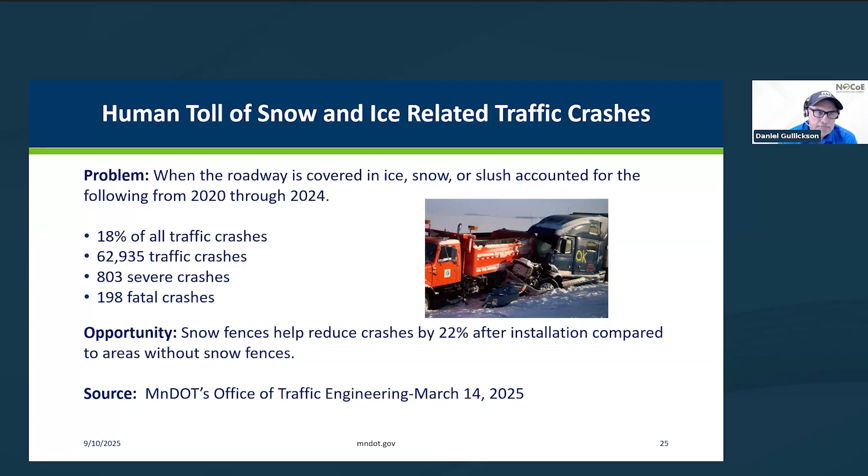You know, one of the keys to a maturing snow fence program is knowing when and where to deploy snow fencing. And in MnDOT, we actually have a team of designers whose job is to design blowing snow control treatments. And we look at existing blowing snow problems. We look at, you know, has the land use changed in these areas? Maybe there's going to be a new roundabout project that's going to create a future snow problem.

You know, we get involved with our program delivery folks to look at upcoming projects and look at how we can prevent blowing snow problems after they're built. And then also, you know, finding available funding to help solve these problems. Next slide.

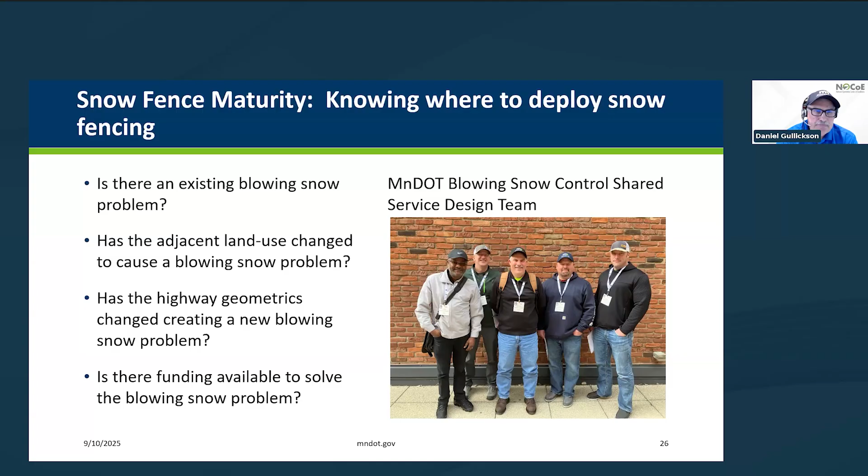So in Minnesota, along our MnDOT maintained roadways, we have about 737 living snow fences. Many of them were planted in the 1970s, maybe some even earlier, and they're still providing function for us. We have 223 structural snow fences, and our structural snow fencing is the flexible composite rail type system. Permarail is one of the manufacturers, and we also have another manufacturer named Magnum Ventures that make the structural snow fence for us. They come in 4, 6, 8, and 10-foot tall heights.

We also still put up the seasonal snow fencing that's 4 foot tall, put it up in the fall, take it down in the spring, and then work with landowners and farmers to do standing corn rows. Standing corn rows is our gateway to work with a farmer landowner to see the benefits of controlling the blowing snow, and to introduce them to maybe a future living snow fence or structural snow fence that ends up being a longer term commitment. Next slide.

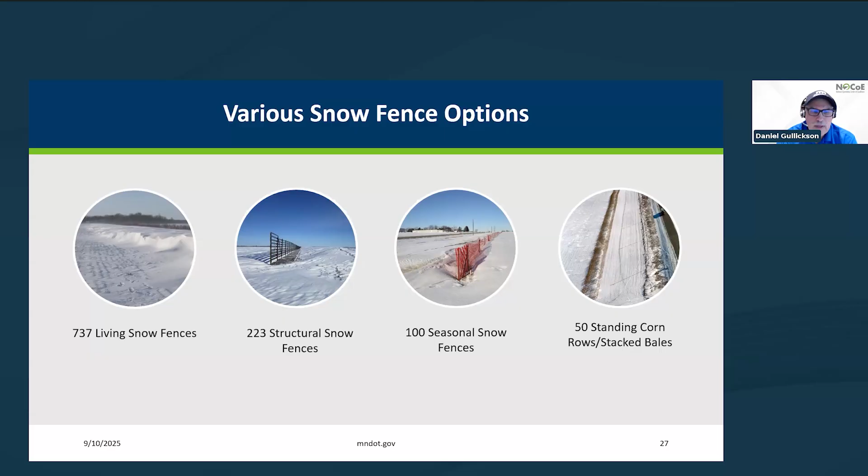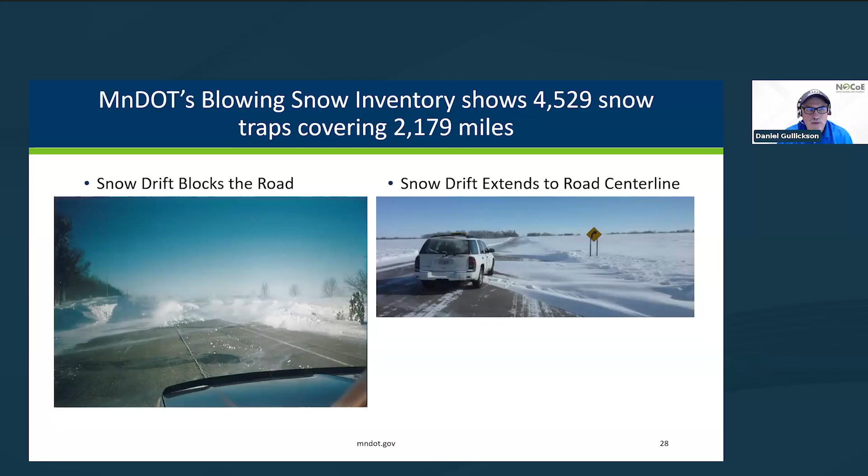MnDOT has been inventorying our snow problem areas, we call them snow traps, since 2001. And we've got about 4,529 snow traps covering about 2,179 centerline miles of roadway. And so seeing the drifting on the road is one thing, but blow ice is a little more difficult to explain. So let's go to the next slide, and why don't we hit play?

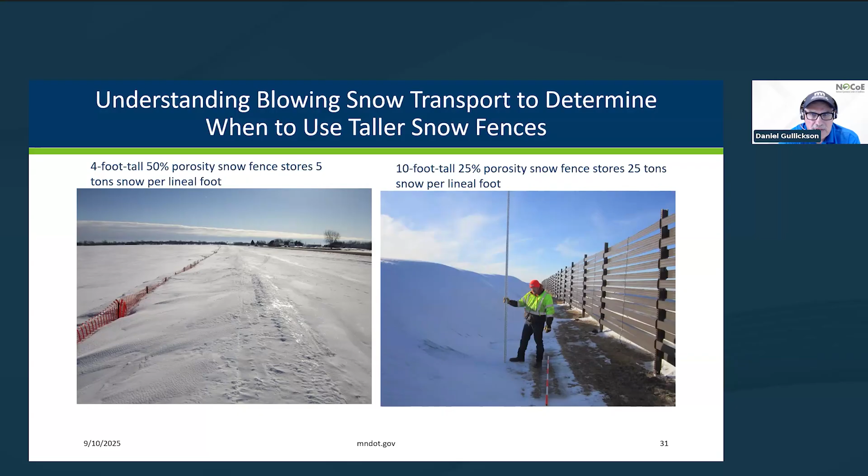So with the 4-foot tall snow fencing, it has the capability of holding about 5 tons of blowing snow. And we have areas of western and southern Minnesota that are more open, that have almost unlimited fetch distances. There we get anywhere from 10 to 20 tons of snow. And those 4-foot tall fences aren't tall enough. And that's where we start to introduce the taller fences, the 8 and the 10-foot tall ones, to contain that amount of snow. And so taller fences do make a difference. Next slide.

Back in the 1960s and early 70s, mechanical snow removal became more popular, trying to use brute force to open up our roadways. We know that this equipment can't be everywhere at once. And also, having closed roadways is very damaging for freight and commerce and the like. And so what we've been looking at is where to deploy snow fencing in areas where we have to go in there with this heavy equipment, to reduce the need to do that. Next slide.

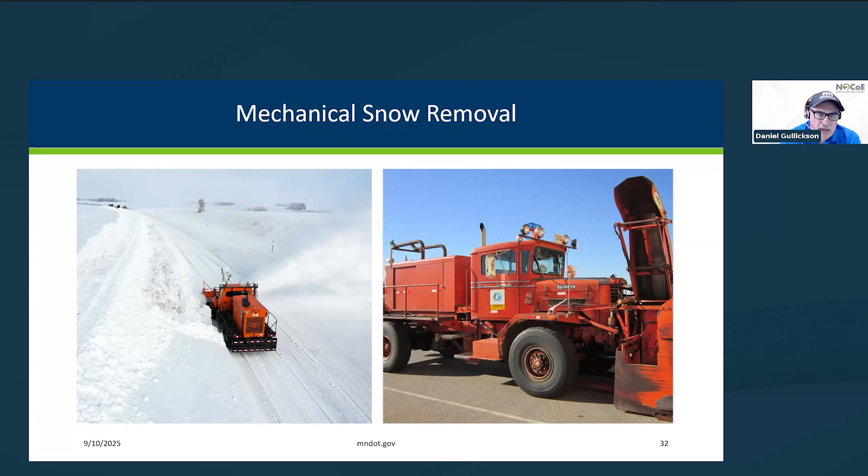A teaspoon of salt has the capability of polluting 5 gallons of water. That's from our Minnesota Pollution Control Agency. And we have found where we've deployed our snow fencing, this is along Interstate 94 east of Moorhead, that we were able to reduce our chloride or salt use by 40%. And that is a huge savings in terms of helping reduce water contamination and being more efficient with our salt. Next slide.

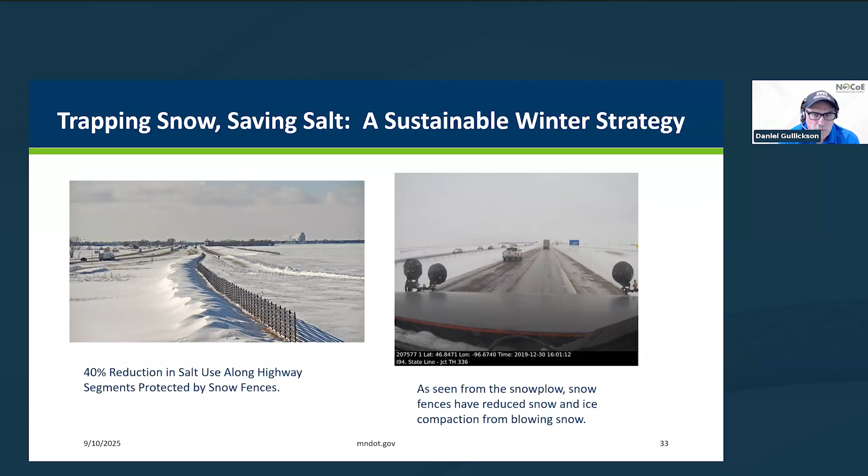In 1991, Ron Tabler, who you've heard before, reintroduced MnDOT to the science of passive blowing snow control. In 1991, he came to Minnesota. I had the opportunity to be there for that conference. And we really were connecting our maintenance office and our design community to work together.

Because Ron Tabler said, blowing snow isn't just a maintenance problem that you have to plow your way out of. There's things that we can do in design in terms of widening the ditches, raising the road profile, adding snow fencing. These are things that can work in harmony and help our snow and ice fleet be more efficient. Next slide.

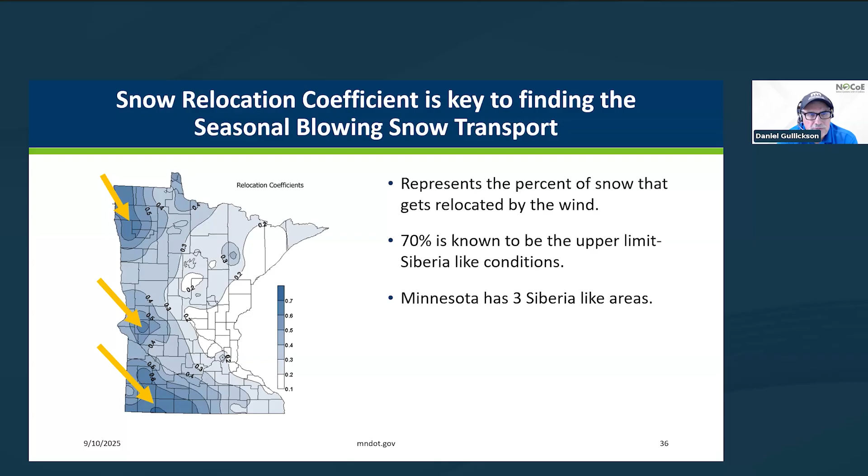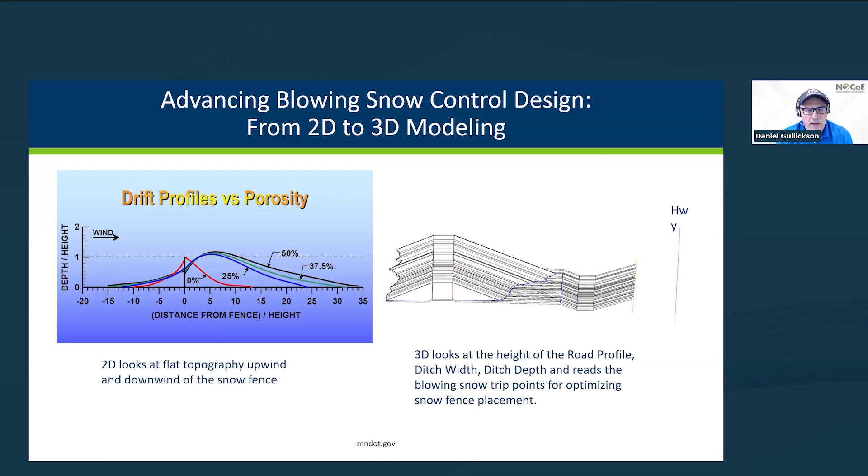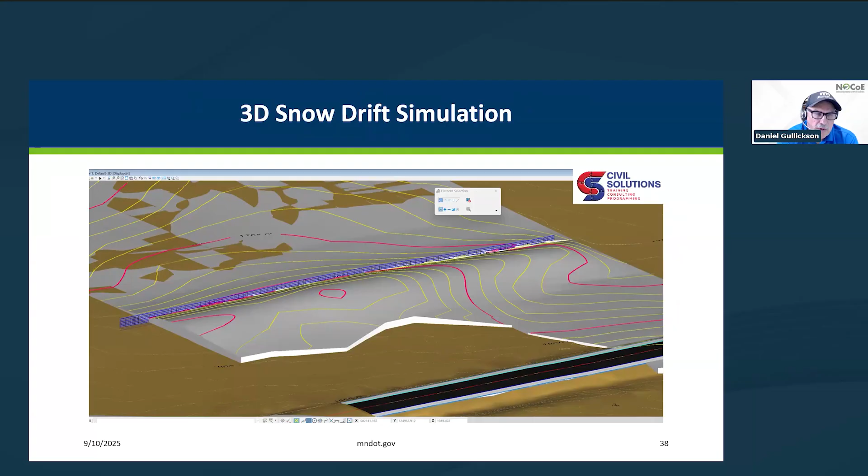And so we are currently working with Civil Solutions, an engineering firm out of Chicago, Illinois. Civil Solutions is working with us to develop a 3D snowdrift simulation that would incorporate the design of the snow fence, looking at the undulations in the topography, and draw what that snowdrift would look like, which will be a really good communication piece for landowner engagement, as well as working with our maintenance community. Next slide.

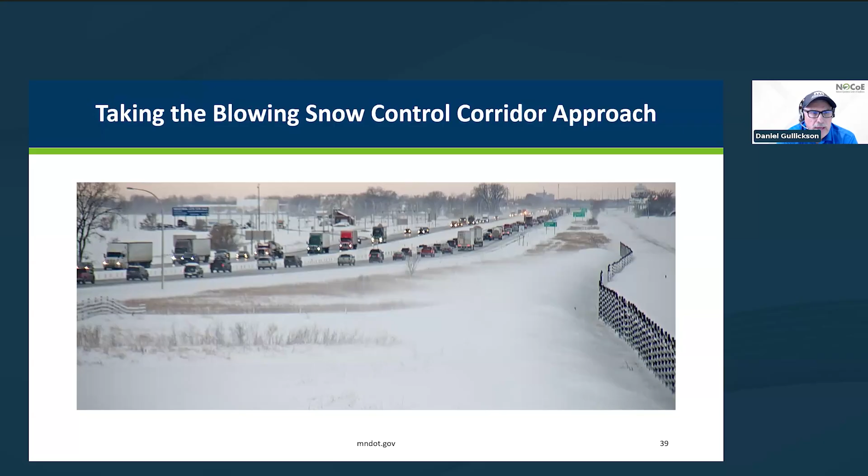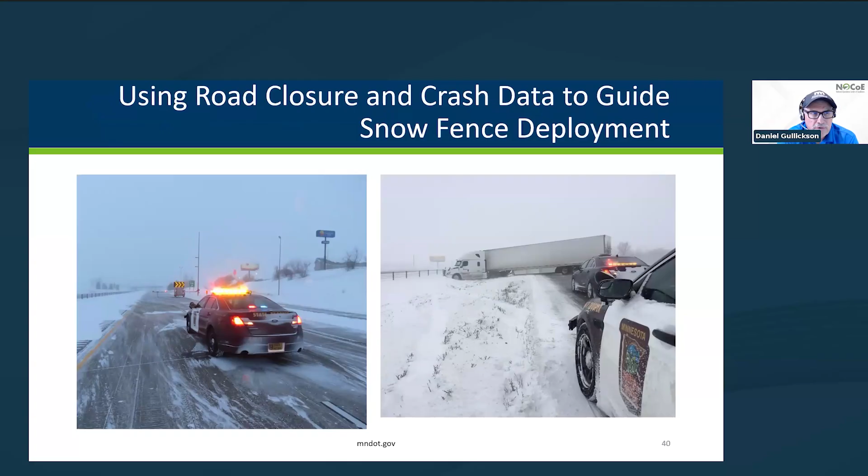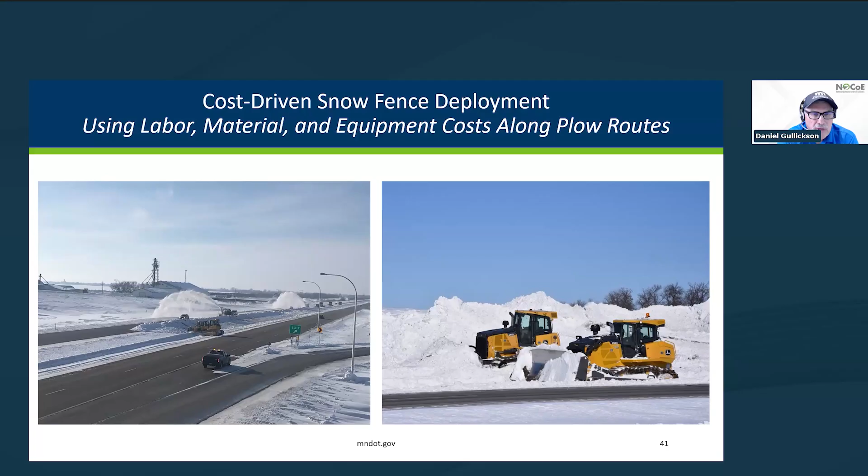And so as MnDOT looks to the future, we're taking more of a corridor approach to blowing snow control. That's going to create a more consistent driving experience for the motoring public. Next slide. As we look at this corridor approach, we're looking at what's the frequency of road closures, what's the crash data to help guide where we should prioritize our efforts, because we've got like 5,000 snow traps out there. Where do we begin? Next slide. We also look at the labor, material, and equipment costs that are being tracked in terms of what's being spent on those plow routes. Next slide.

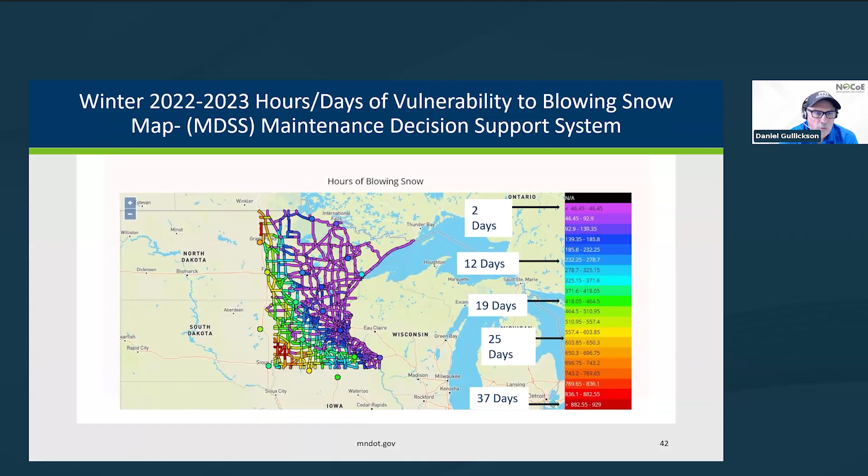And then, we are managing the wind is what we're managing. With the Maintenance Decision Support System, the MDSS, we're looking at the frequency and the vulnerability for where wind is a problem. As we get into the western part of the state, we're looking at upwards of almost 800 to 900 hours where the wind is moving that snow around. And that helps us see where the greatest need is for snow fencing.

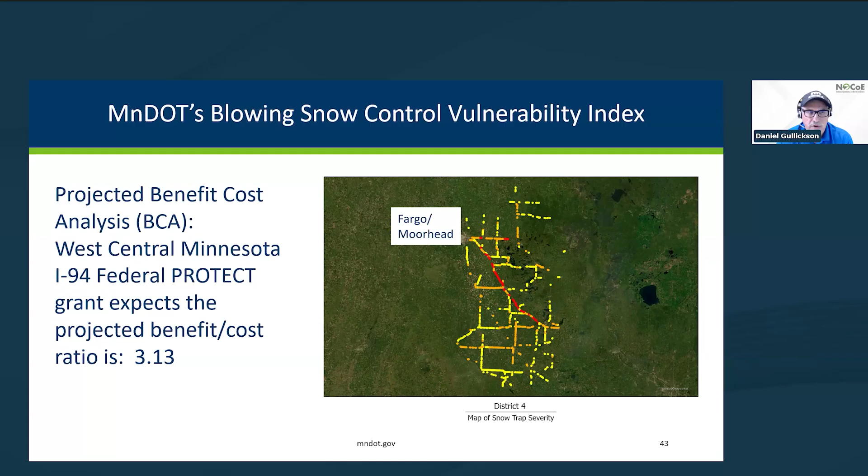Next slide. Utilizing this concept, we're able to start to see which corridors in a MnDOT maintenance district would show up as being the most important ones to address. This would be the I-94 corridor in this case, the areas showing up in red. This scoping tool really helped us to be successful in getting a federal PROTECT grant to get federal funding to help with the mobility and the transportation of this very important corridor. And we found with this PROTECT grant a benefit cost ratio where for every dollar spent, there was going to be a $3 return.

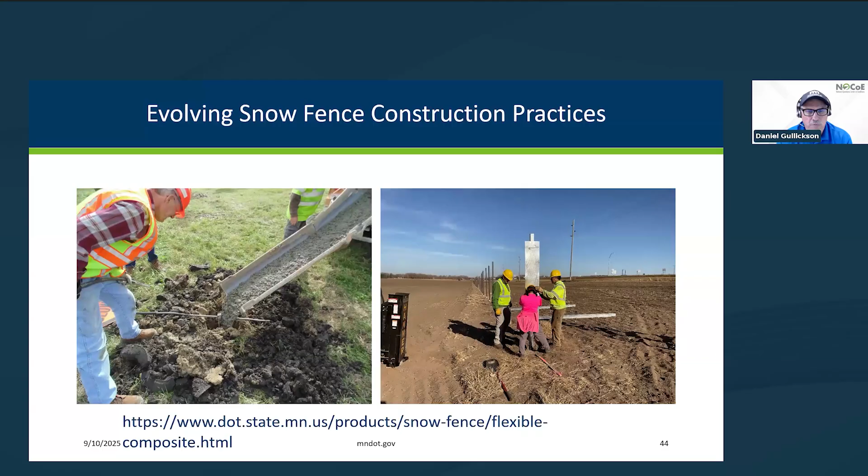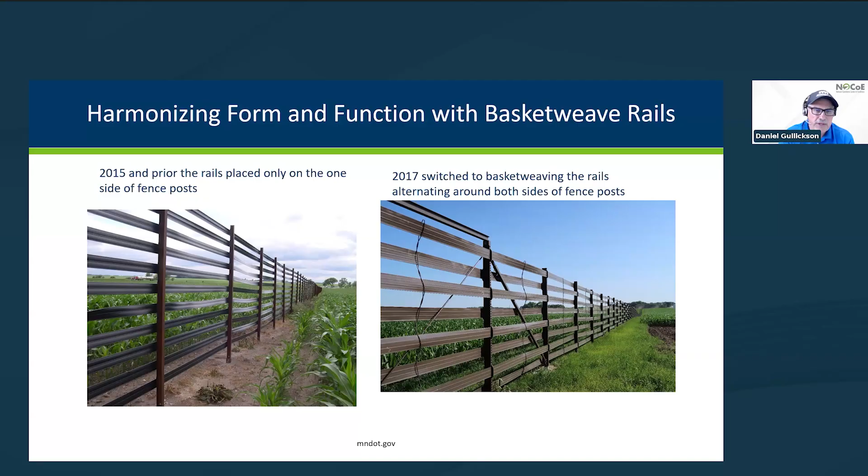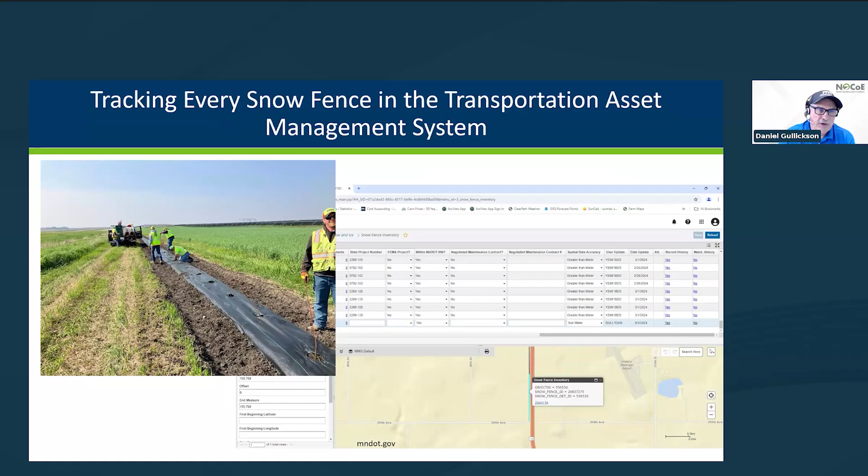We're also making an effort to get every one of our snow fences in the transportation asset management system, tracking where these assets are occurring, because Dr. Tabler used to say the problem is lost with the solution. And so knowing where we have our snow fences will help with the transition as our workforce transitions, to understand why they're out there. Next slide.

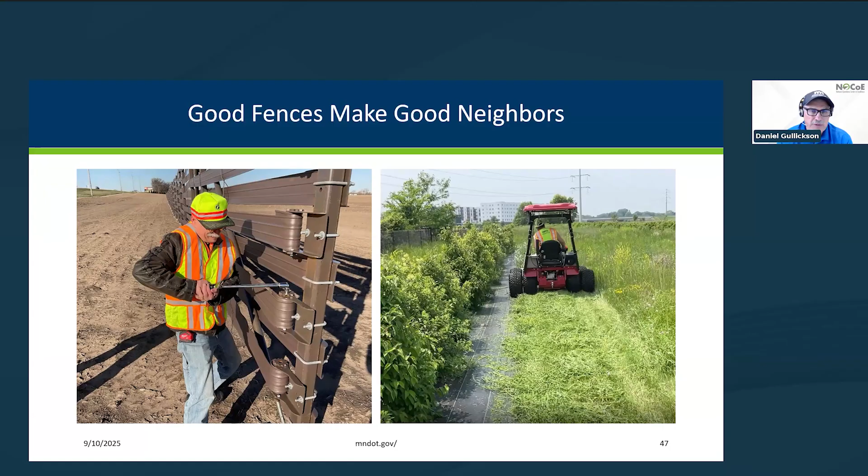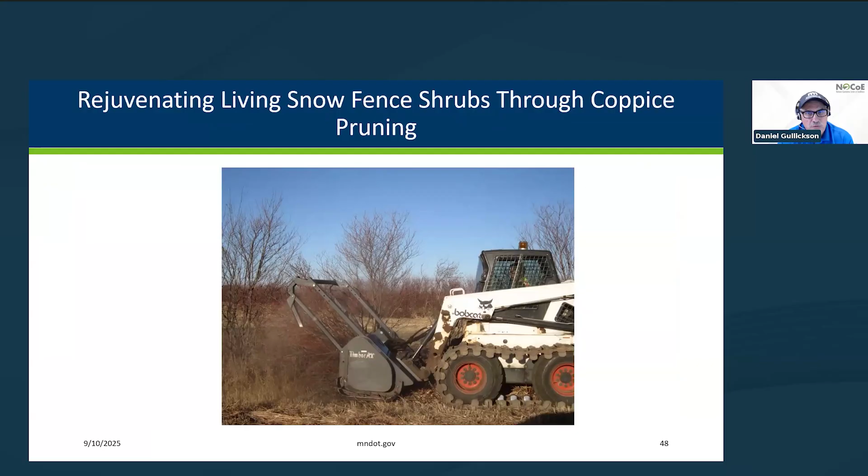Good fences make good neighbors, making sure that we keep our rails tensioned properly so they're not sagging. Mowing around the perimeter of our snow fences with establishment really helps control weeds and helps get more sunlight to the living snow fence to help them grow faster. Next slide. And then, because a lot of our living snow fences are starting to get to be 20 years old, we are now going in and rejuvenating them through coppice pruning. By doing that, it will take out the dead wood. Next slide.

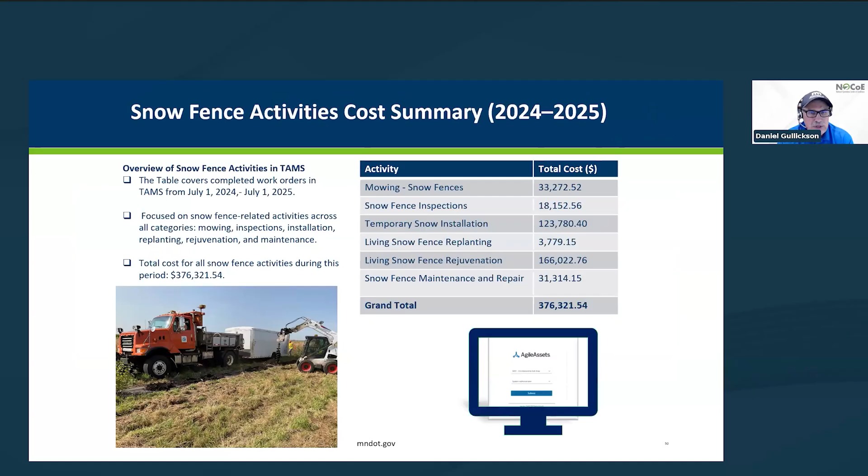And so as we track our snow fences, we spent about $370,000 on snow fence maintenance over the past year. That would be the coppice pruning, the tensioning and tightening of our snow fences, and mowing. Next slide.

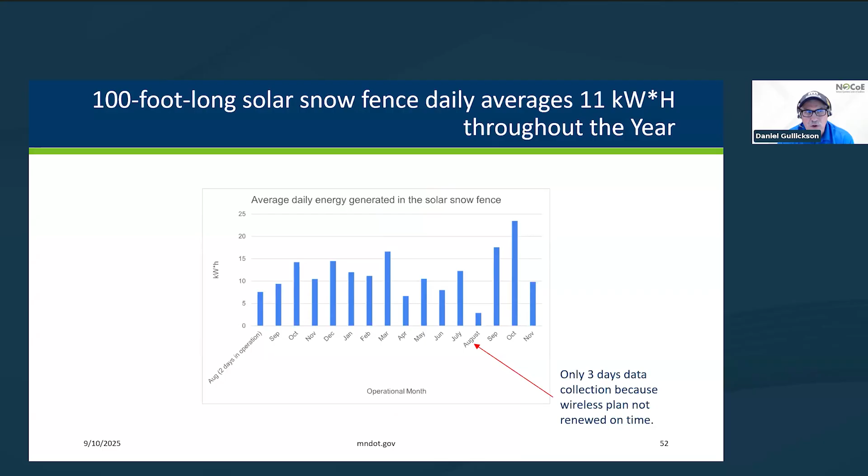Next slide. What we found with that 100-foot section is that it was generating about 11 kilowatt hours of energy per day throughout the year. The snow fence is oriented east to west, and the panels are on the south side of the posts. So it was generating 11 kilowatt hours per day, and to meet the needs of a typical household, it's about 30 kilowatt hours per day.

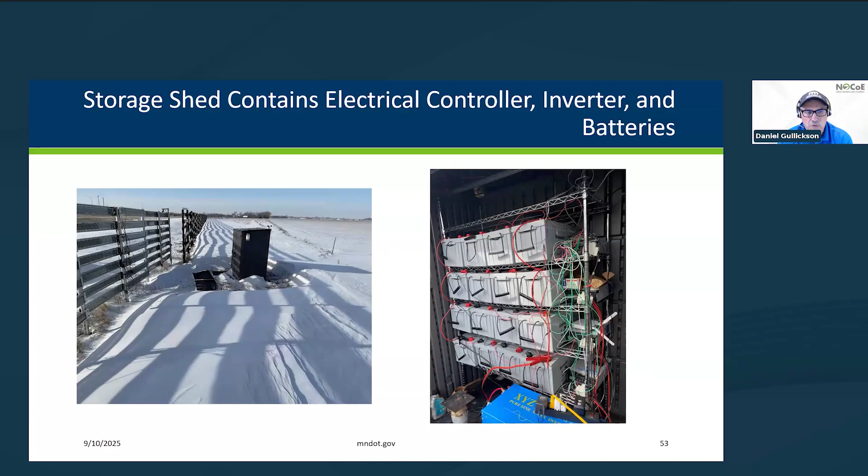Next slide. With this test project, we did not incorporate the energy into the grid. We utilized it on site. We put it into the shed, and in that shed there were batteries with the inverter and the controller. Next slide. And then we used that energy to power the webcam out there with the weather instrumentation.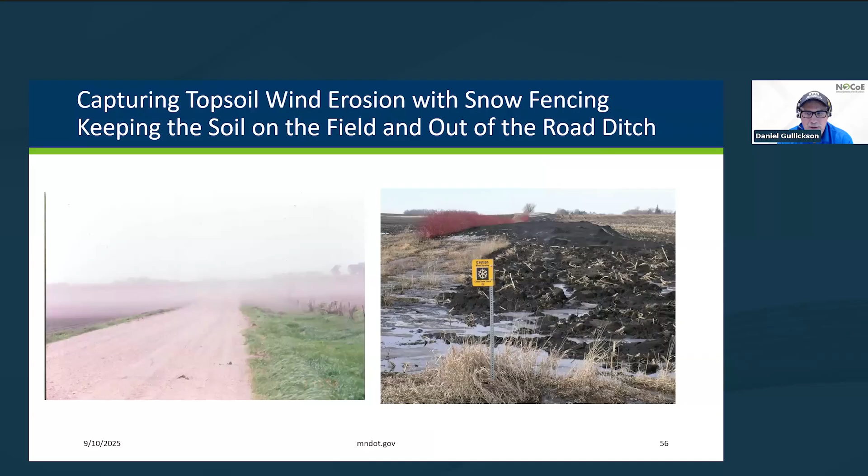Maybe it's to help reduce wind erosion, keeping that topsoil on the farm field and not in the ditches. Next slide. Or maybe it's for the beauty. That might be the reason for someone to want to entertain doing this. And in closing here, next slide.

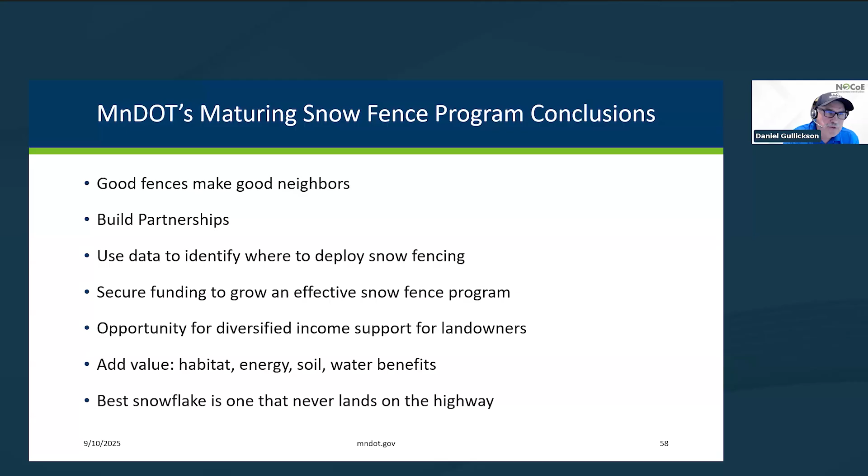A maturing snow fence program is good fences make good neighbors. Build those partnerships, use data to identify where to deploy snow fencing, secure funding to grow an effective snow fence program. Look for opportunities to diversify income for landowners for snow storage, and then get that habitat, energy, and added value. And as Rick Nelson said in winter ops, the best snowflake is the one that never lands on the highway. Thank you.